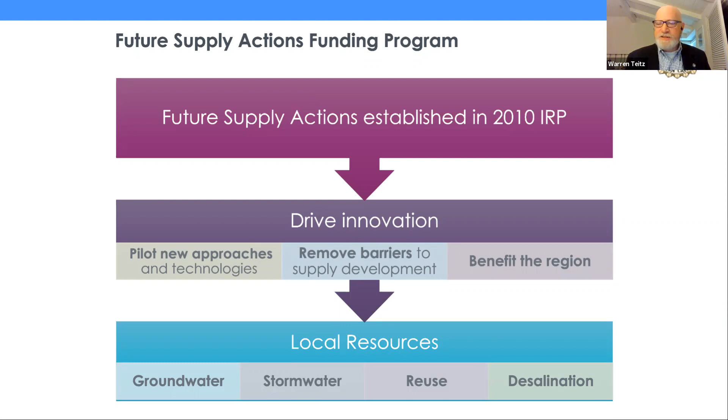So we've invested about $4 million in the current round of FSA studies. That includes $3 million for 14 member agency studies, and also just under $1 million with the Water Research Foundation for 6 potable reuse studies and 1 agricultural reuse study. Most of the member agency studies are wrapping up right now, like this one we're about to talk about. 2 of the Water Research Foundation studies have wrapped up, and the others are in process. We've had 6 or 7 webinars so far, and we've got a few more scheduled throughout the year.

At this point, I'd like to turn it over to Jeremy Crutchfield from the San Diego County Water Authority, who's our member agency partner for this study, who will introduce the study and the speakers. Jeremy, take it away.

Great. Thanks, Warren. Before I get into the introductions, I want to thank Metropolitan for initiating this program. It's very important for our region to be looking at these innovations and opportunities within Southern California. I also want to thank our agreement administrator, Ariba Syed. She has been very helpful throughout this whole program. We actually had a pretty significant scope change early on, and it was a collaborative process with both the Olivenhain team and Ariba and Warren to initiate that and make sure we were creating a project that was really beneficial for the region. So thank you to Met and staff for the assistance there.

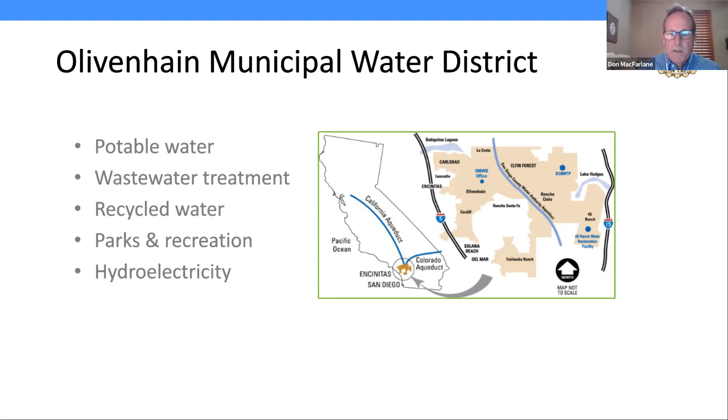I'll assume so. This is in brown, you see the outline of Olivenhain Municipal Water District, and on the left, the services we provide. The district lies primarily between I-5 and I-15, just east of Encinitas in San Diego County.

Some data about Olivenhain: currently we're delivering about 18 million gallons a day to our customers, potable water, that is. We don't have any local resources except that we recycle every bit of wastewater produced within the service area.

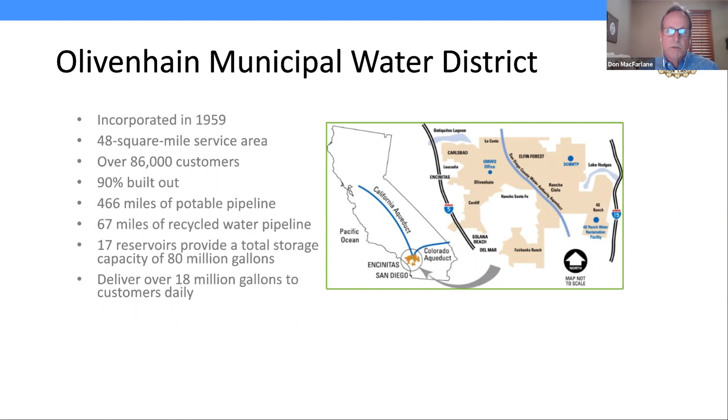So everyone on this call, I'm sure, knows water in California. Metropolitan and the Water Authority do a great job on imported water and reliability, and they also do a great job supporting local supply development, which is really what this is all about - the Olivenhain study.

In 2015, 2016, we got a grant from DWR and went through a feasibility study. Geoscience was the lead on that project. These are the steps we went through: looked at availability of groundwater, quality treatment options, did some conceptual planning and cost estimating, and compared to our other options.

One interesting part of this was we had a lot of options for brine disposal, including agencies in San Diego County that have discharge permits for lagoons, coastal lagoons. There's also the ability to inject water near I-5.

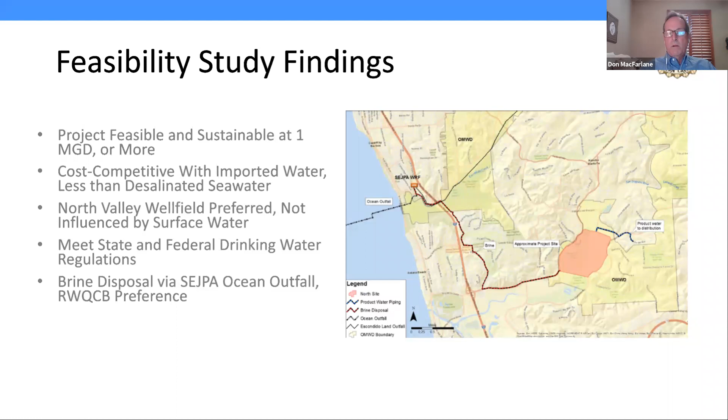We had a great meeting with the regional board here in San Diego, and they gave us some good guidance on this and really recommended that we use an ocean outfall. That's their preferred option and would be the best option for us. They also confirmed that our project was consistent with their vision.

Because of the feasibility, we went into test well construction. That's what Geoscience recommended as the next step, a 1-year pump test. I'm sure you're all familiar with well construction.

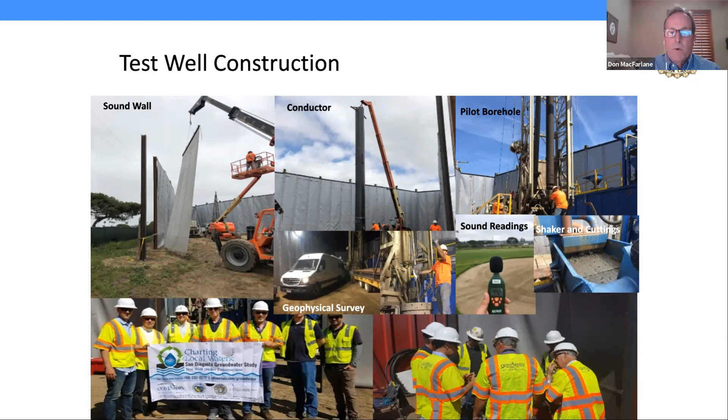The thing that's interesting here is the sound walls, about 20 feet high around the well. We did that for two reasons: one, to shield the local residents from noise, and since we're right next to the San Dieguito River, which is habitat, we shielded the birds also from the noise.

Again, we enlarged and constructed the well. I'm sure you're familiar with these processes. We did a complete pump development and pump test analysis.

And that led us then to the long-term pumping test. With that, I'll turn it over to Brian Villalobos to describe that work.

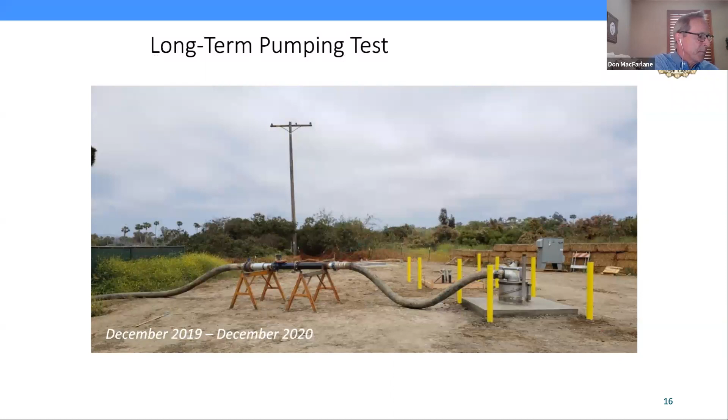Thank you, Don. So what we'll talk about now is just what the results were of the long-term pump test. But I just wanted to briefly say that this stage of the work was actually the third phase.

Initially, we were looking at a water budget for the basin using empirical data. Then we constructed a groundwater model, which I'll talk about in a minute, calibrated it to see how to refine those water budgets for the basin. Lastly, we wanted to stress the aquifer through a wet and dry sequence, an entire year, to have a given stress on the aquifer so that we could back in to see what the differences might be in our water budget assumptions moving forward.

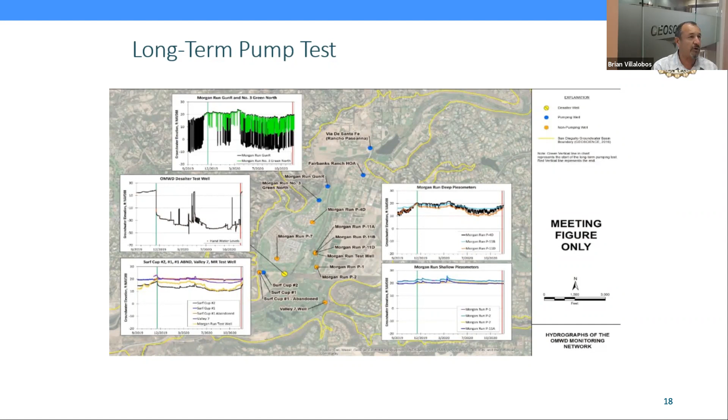So again, the wells shown here are the observation wells we've used for the one-year long pump test, and each one of those hydrographs we'll get into in a second. But also, there are existing pumping wells, and part of the project is to understand how much of an increment of water would be available to develop even as a brackish source, but still not harm the folks that are already in the basin pumping.

So again, the wells that were actually influenced by the test well pumping are shown on this diagram. Surf Cup 2 well is an existing well used by the Surf Cup facility, but it was shut down during the pump test, so we could use it as a monitoring well. Also the three other green dots, the two up where it says Morgan Run P11D and Morgan Run test well, they're almost on top of each other, but we put transducers in those just to see if those would be influenced, and of course they were.

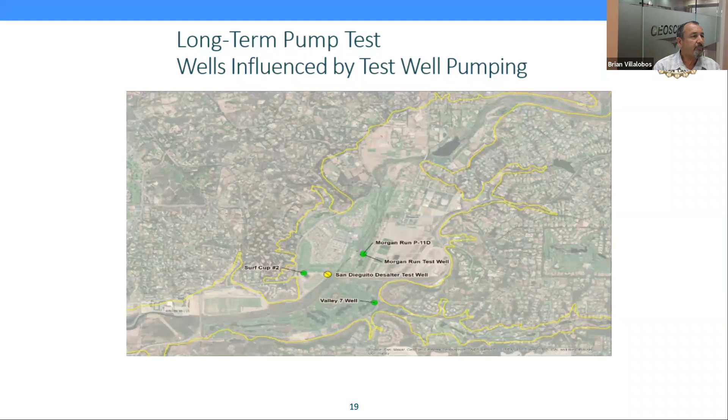So here are the hydrographs of the wells that were influenced by the test well pumping. The green vertical line is the beginning of the pump test. You can see just to the right of the green line, immediately those wells responded. So when the well was turned on, the water levels in those wells begin to decline a bit, showing that they're under the influence of the pumping well.

The thin blue lines at the bottom are the rainfall during the period of the test. You can see that those water levels do respond to rainfall, even though these are primarily in the deep aquifer. There's a gray bar, and that represents Lake Hodges releases. During this period after the heavy rainfall in early April, water was released from the dam, comes down through the gorge, and into the forebay or main recharge zone of the basin, and you can see it had an effect on the water levels. We had a shutdown—there was a leak in a pipe. We fixed the pipe and started the pump test back up.

Then the center to the right hydrographs show the dry season, the summer season. You can see the water levels respond during the dry season, and then after the rainfall in November, they begin to increase. The red line is when the pump test was shut off, and the sloped lines just to the right of that red line are the recovery of those wells.

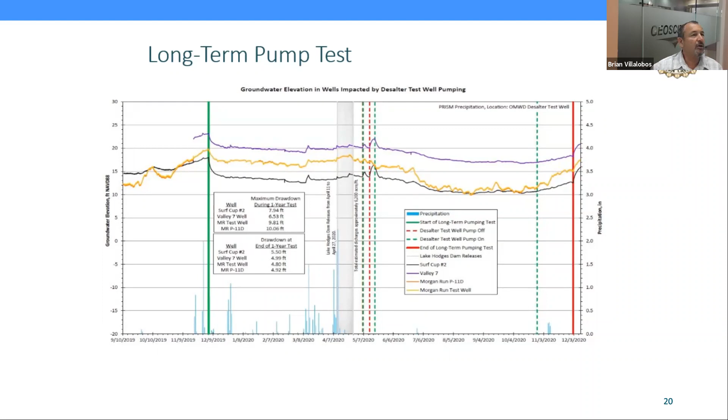So these are piezometers now, observation wells that are in the shallow zone. The San Dieguito basin is like pretty much all of the coastal basins along San Diego County, with shallow riverbed type aquifers. The basins are shallow and not that wide. However, there's been significant production over the years historically, so there's an upper aquifer separated from a lower aquifer by a pretty significant silt and clay aquitard.

So these piezometers are screened in the upper zone, from ground surface essentially, where water levels are shallow down to the top of that clay bed. What we see here is that the shallow well showed absolutely no influence from the pumping taking place by the test well, because it's screened only in the deeper part.

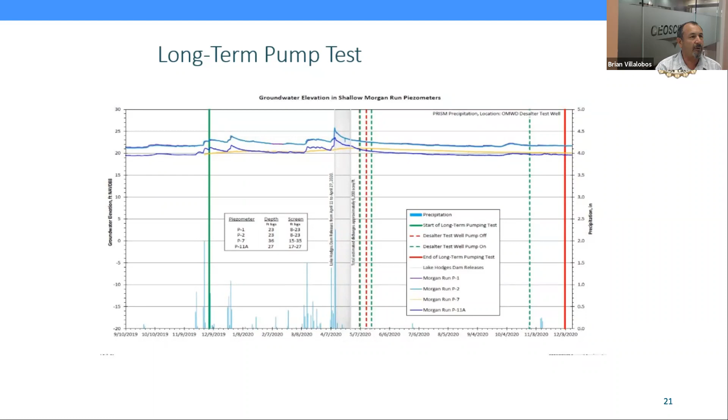This also shows piezometers that are near the existing pumping wells. The black line is the Morgan Run P4D—in other words, it's a piezometer in the deeper part of the aquifer, D stands for deeper—and so are the pumping wells in the golf course. In the black line, you can pick up the operations of the golf course wells very clearly, so we're able to see where the golf course wells were running, influencing the piezometers there.

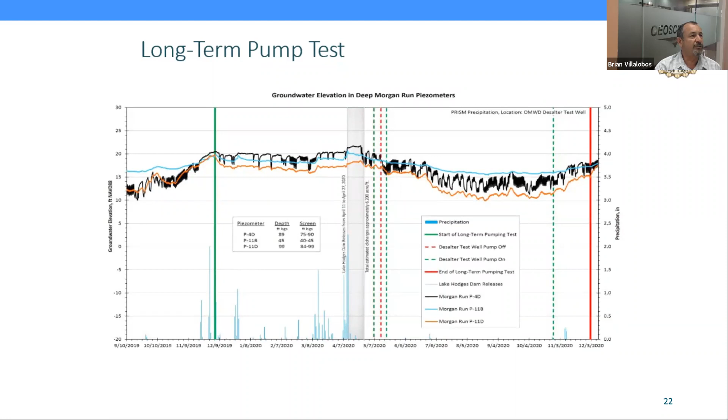So the other thing is water quality. In the early stages, we were looking at iron and manganese, shown as the pink and green zones, but also the orange is TDS. You can see essentially the entire basin is brackish, from as much as almost 6,000 TDS down to some parts at 1,800 TDS. So everything in that basin at this point is brackish. It's more brackish as you move downstream, and it's likely reflective of historical seawater intrusion from agricultural pumping, but also there's some thought that the basin geology contributes to that TDS. The entire basin essentially is brackish, non-potable, and so this project makes complete sense from that standpoint.

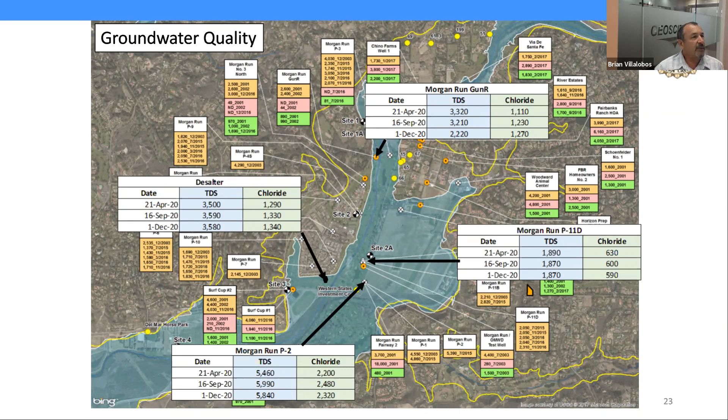And I guess this goes back to Don, and I'll shut myself off.

One of the things we did during a pump test was take water out of the test well. We knew from historical records there were high levels of iron, manganese, and arsenic naturally occurring, as it does in many of the region's groundwater basins. This is a health concern as well as a concern for the integrity of the RO membranes. So we tested 2 filtration media, GreensandPlus and Mang Ox.

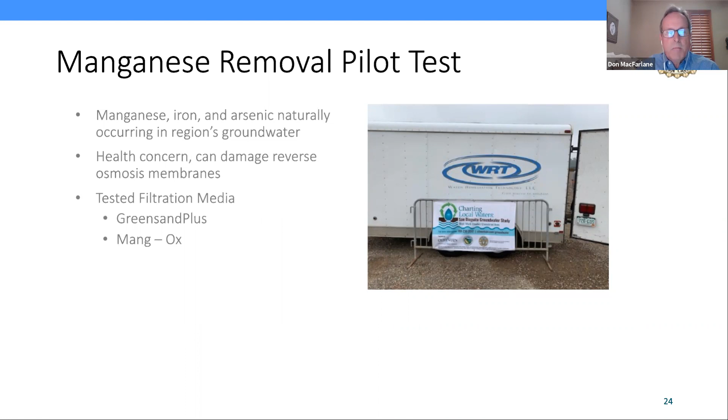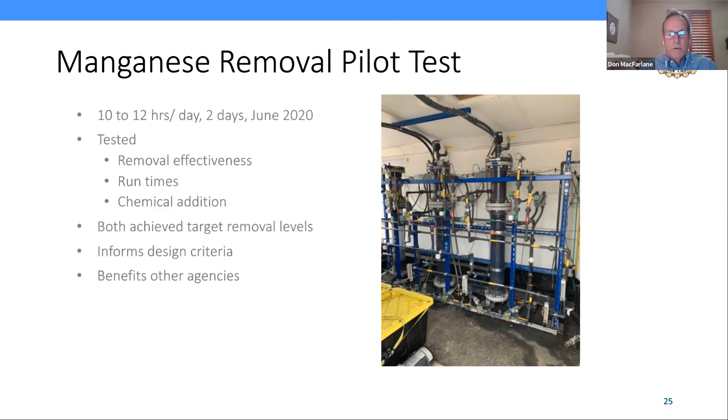We ran it 10 to 12 hours a day for 2 days in June 2020, testing the removal effectiveness, runtimes, and chemical addition. Both technologies achieved the target removal levels we were looking for. We updated our criteria, including more updated water quality information, which is beneficial to other agencies looking for this kind of treatment. I'll hand it back to Brian at this point.

Thanks, Don. So the next part of the analysis was to take the data from the long-term pump test and update the groundwater model that was constructed in the previous several years.

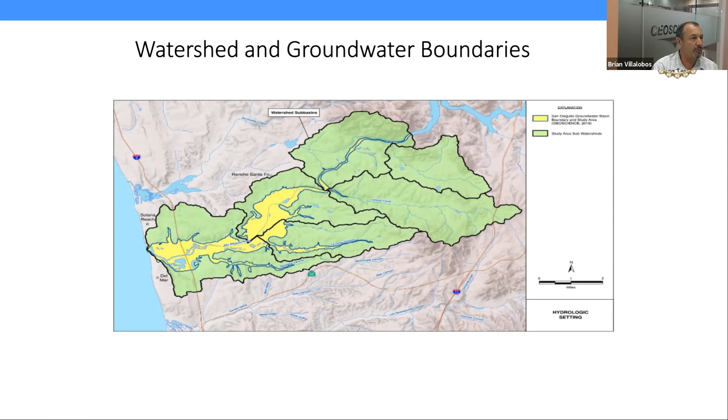The groundwater model, the area of the watershed, is shown in green. The black lines are the outside watersheds and also sub-watersheds that contribute to the San Dieguito Basin, which is shown in yellow.

The model is a Modflow model with cell sizes of 50 feet by 50 feet, and the black rectangle is the edge of the model.

The San Dieguito Basin was built into 5 layers. Essentially, layers 1 and 3 represent the shallow and the deeper aquifers, and 2, 4, and 5 are low permeability geologic units in the basin. This was done by looking at the numerous well logs in the basin to create a conceptual model that formed the basis for the groundwater model.

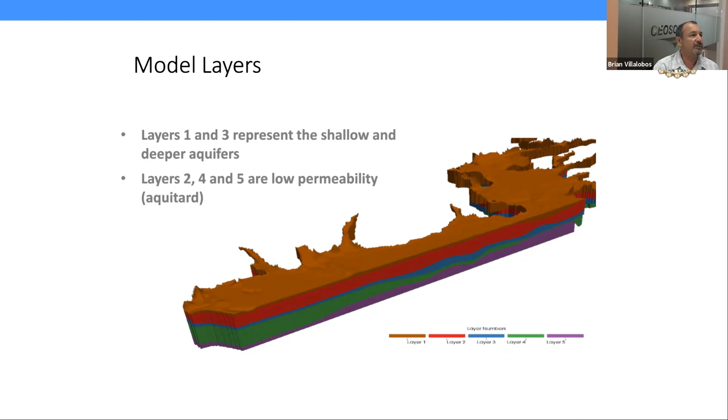For the groundwater model update, as a result of the 1-year pumping test, we refined the layer thicknesses based on the new drilling of the test well. We also refined the aquifer parameters based on the pump test and the response of the nearby wells. Each one of those provided additional data for the model.

We extended the model calibration period from 2001 to 2020; previously it was at 2016. We updated pumping tests for existing pumping wells. During the interim period between the initial model and the start of the pumping test, we gained more data about the local wells, which ones were pumping and how much, so we were able to refine the model with the latest data.

We added the test well pumping, as I said earlier, and then reran the scenarios we originally ran to look at what the water budgets would be.

Here again is the basin. The groundwater model had 41 target wells, and we had about 2,451 water level measurements that we were calibrating against.

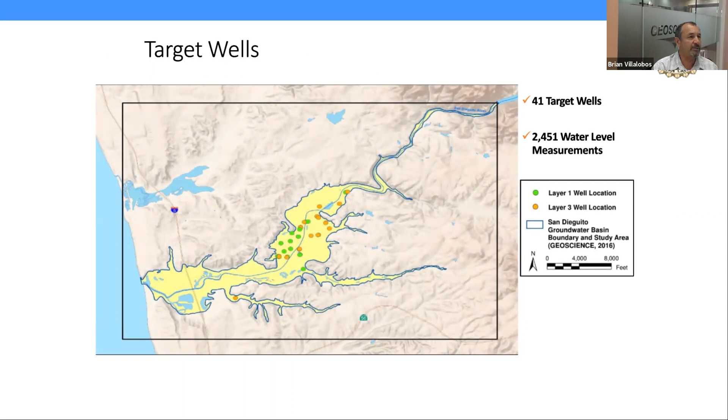Here are the calibration hydrographs. The blue lines are model simulated water levels, and the black dots and lines are the actual measured data from those wells. In general, they plot well. There are a few that are slightly off, like in 33 NC, but most plot quite well.

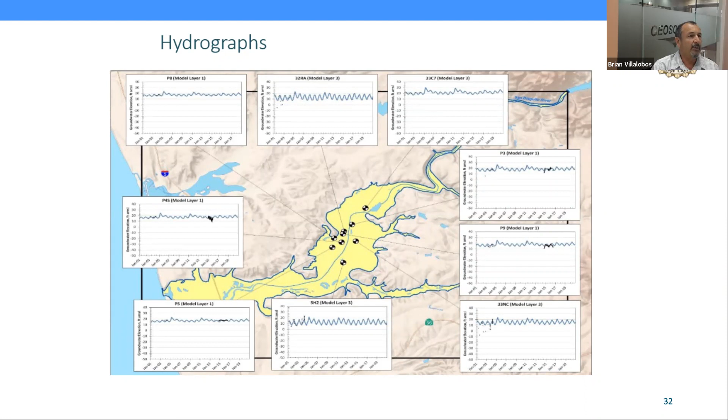The calibration statistics are here, and typically the bottom one is what we look at primarily: the relative error is 6.8%, and the standard acceptable relative error is 10%, so we were below that.

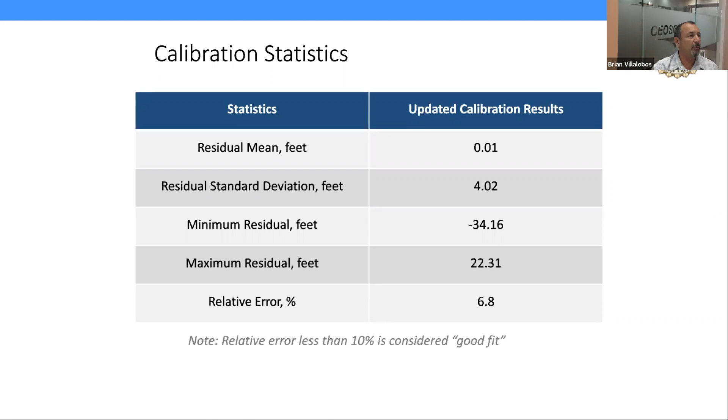With that recalibration of the model, we then looked at an updated water balance. These are the water balance components: groundwater pumping, evapotranspiration, discharge to stream, mountain front recharge, areal recharge from rainfall, and the several ponds in the basin, return flow from applied water, and stream leakage. Then the outflows are shown, and then change in storage, so we're looking at how the basin has performed and what has been the long-term change in storage.

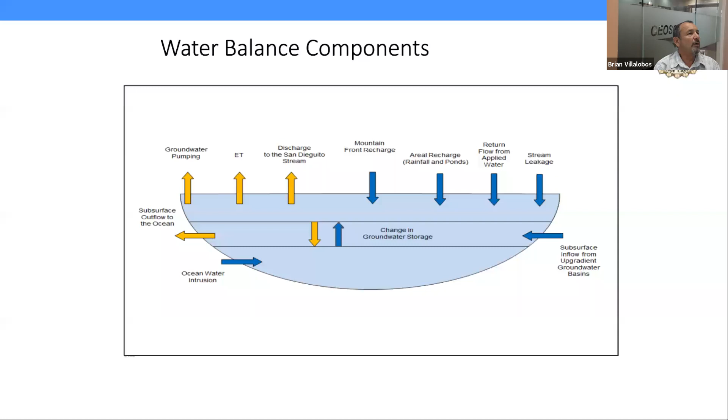In 2017, we were looking at a scenario that included 2 well sites, these being assumed well sites. Site 2 would be 500 GPM, and site 2A would be 500 GPM, for a total pumping capacity.

This is the total additional pumping capacity in the basin beyond what we were already simulating from known pumpage, as well as knowing where water demands were being met, apparently through wells. The total pumping in acre feet was about 1,600 acre feet.

For the 2021 modeling, the test well was able to produce 200 GPM, and I'll talk about why it was that rate. We added site 2 at 400 GPM and site 2A at 400 GPM to come up with a total of 1,000 GPM, or 1,600 acre feet.

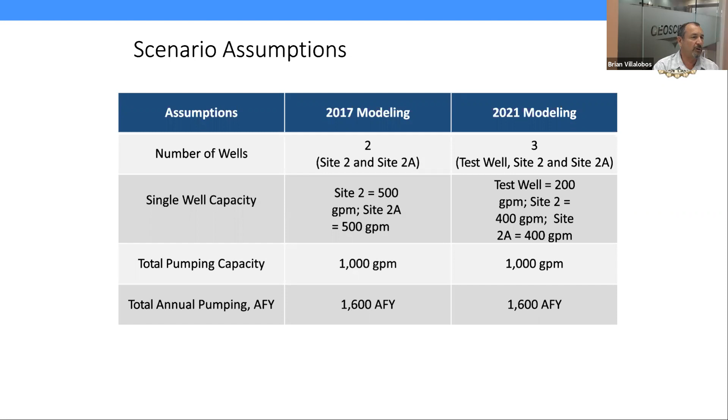The reason we assumed these larger well capacities is historical data has shown that many of these wells, in the center of the basin near site 2 and 2A, produced at high rates. Morgan Run test well produced 600 GPM, essentially in the center of the basin. Western States Investments historically produced 600 GPM. Further north toward the forebay, you can see 1,000 GPM, 800 GPM. So we know historically that wells in the basin can produce at rates up to 1,000 GPM.

The test well was sited in an area that produced a little less, primarily because the available site to test was closer to the edge of the basin rather than being able to penetrate the full thickness of the aquifer. But we know that as the project moves forward, there are areas that can produce those higher results.

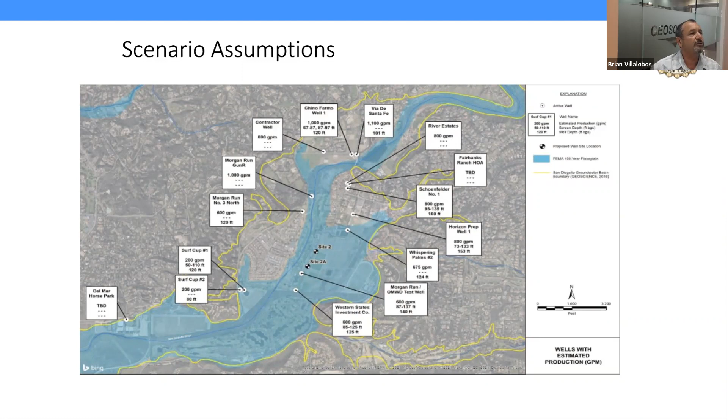I won't go through each one, but essentially we see that in the calibration run, the change in storage with no project is about 130 acre feet. In the 2021 calibration run, the change in storage was about positive 110. In 2017, after pumping 1,000 GPM or 1,600 acre feet, the negative change in storage was minus 260 acre feet. With the updated scenario run, the change in storage was a negative 150 acre feet per year. That represents approximately 1% of the groundwater storage.

For the time frame we're looking at, 2001 through 2020, if you look at a cumulative departure from the mean, it's primarily a dry downward decline with a couple of peaks in between. So in the long run, it's very likely that under natural conditions this could balance out. Again, minus 150 represents about 1%.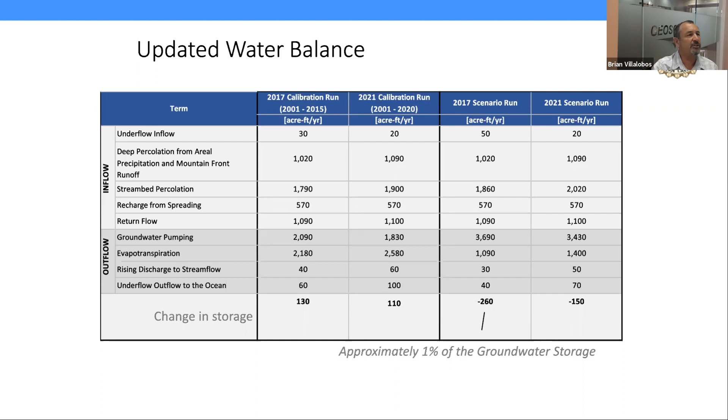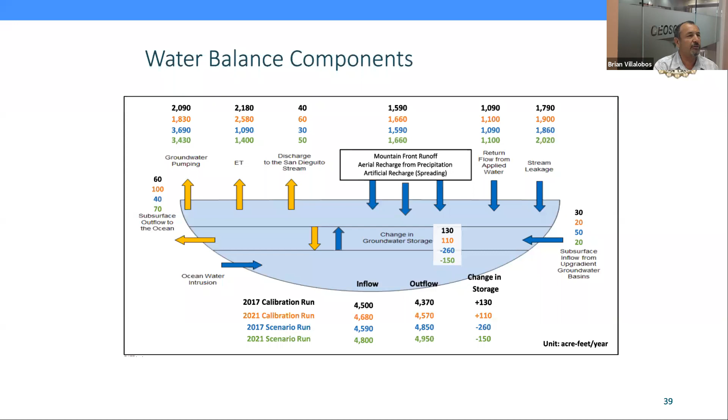So again, these are the water balance terms from both calibration runs, and I basically just walked those through. If you have questions, we can talk about individual terms.

So, next steps. With these positive results from the pump test, the district is going to continue the feasibility assessment. We got an initial check relative to imported water sources and seawater desal.

We're going to subject the project to a pretty thorough economic analysis, looking at optimistic and pessimistic ranges of variables, do an independent check on the cost estimate, look at siting in the valley, do some peer review and sustainability review. That'll look at water rights and what's the best process for the district to secure a supply of water—is that a SGMA process, is it CEQA, or something else?

This is all to provide information to district staff and ultimately the board of directors through a couple of workshops. It's really decision support information so they can make an informed decision on whether to keep going with this project or not.